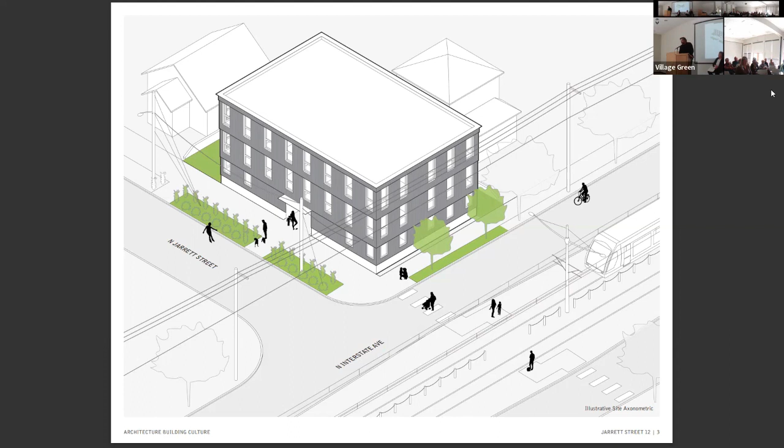Jarrett's a very, very tight little street, and obviously we can't do anything on Interstate — it has to stay operational. So we quickly went to modular construction. It meant we could reduce construction time probably by about 40%, and meant probably 80% of the construction was done in a factory.

Modular construction allows us to build different aspects of the project simultaneously. While we were working on site, while the project was in permits at the local jurisdiction, we already had our state approval for all the aspects that were going to be built in the factory. We could start constructing the modular units even prior to our permit being issued at the city, and once we had our permit for site construction through the city of Portland, we could also start site work — so there's work happening simultaneously, greatly reducing construction time for multifamily development.

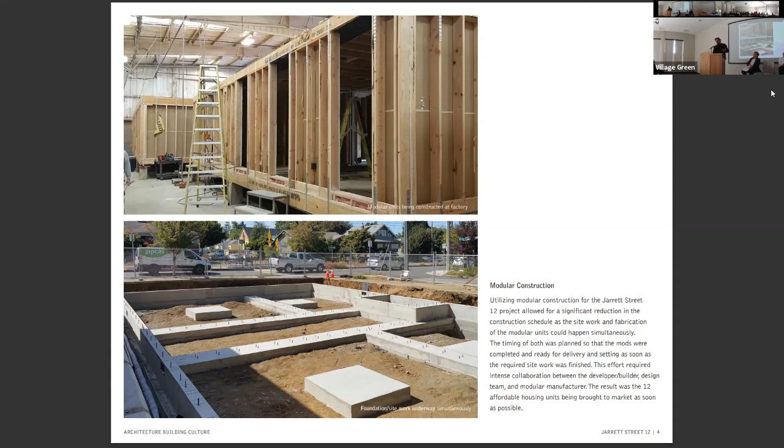One of the biggest things you're really trying to do is minimize risk, but also minimize time. Time is money, and it's also an issue in bringing affordable housing units online — because in a conventional construction and delivery sense, it's just too slow to deliver enough units.

Here's a little diagram showing how the building is made up of 15 modular units. Some dwelling units are completed by putting together two mods — in this case, they're all completed by putting together two mods. It was kind of unique; we had to force some conditions on the mods that you might not normally do if the site had different constraints, orienting the sites and the mods north-south because the site is constrained not only in size but also by power lines.

So you can see the crane having to lift these things almost vertically, bring them over, get them over the lines, turn them and bring them down. We set the 15 mods in 2 days, meaning we only had to close Jarrett down for 2 days — which, except for maybe one neighbor, everybody was pretty happy about.

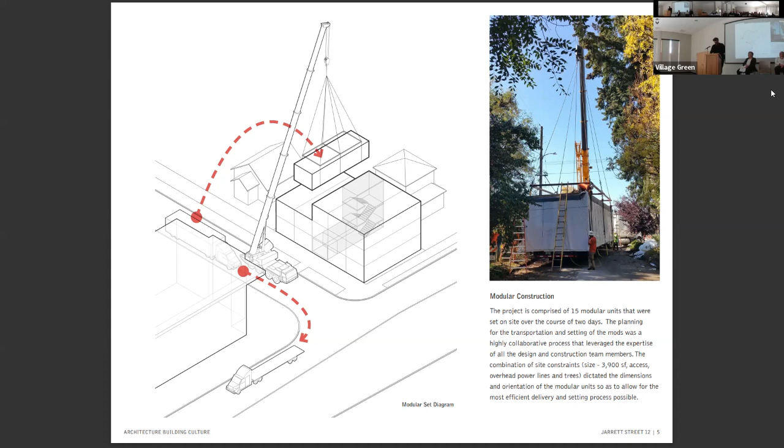If we go to the next slide, you can see what it also forced us to do: create a very efficient, compact plan. Even within this small scale multifamily project, we had 3 different unit types. We had a very small studio unit on the ground floor, directly off the entry. The back units, the southern units, were a stack of 3 one-bedrooms. And then you also had a larger open one-bedroom. But all these are very modest. The largest unit was, I think, 556 square feet, so they're pretty modest in size.

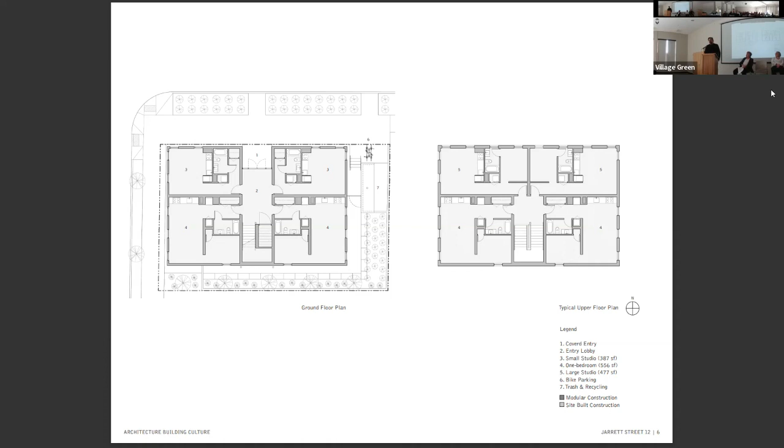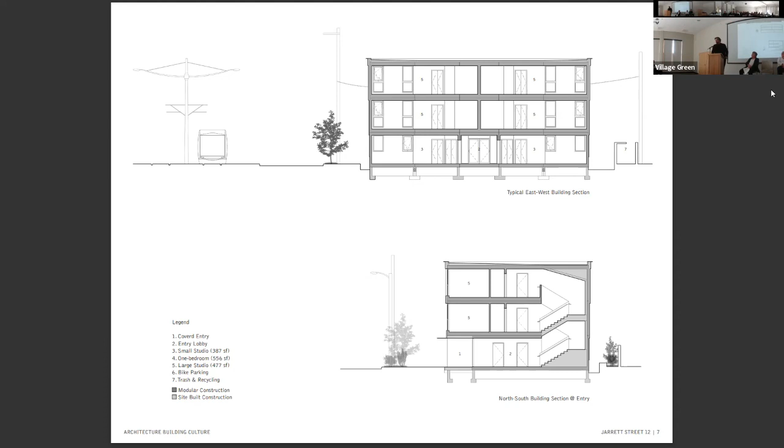Next slide. Another key aspect, which gets to what we'll be talking about, is construction costs. We've done a lot of work with this particular developer, who is very interested in bringing for-sale affordable units, usually focused on first-time home buyers. This particular typology of small infill multifamily housing on what were predominantly single-family lots lends itself to probably the most affordable construction type. These are all type 5B - not to be too technical, but it's the way you build a house, basically. It's very simple construction. Modular construction, especially wood modular construction, is effectively a slightly more robust wood frame structure, because each mod is built the way you'd build any wood structure. They just have to be structured so they can be transported, but it's just wood frame construction. So it lends itself quite well to this type of project.

Next slide. The other aspect to this gets to zoning, and all cities have different versions of this. In Portland, this is in a design overlay zone, which means a normal project might have to go through design review, which adds a huge amount of risk to the developer and a lot of time. But the city of Portland also offers objective community design standards, which if you opt into, the design review gets folded into your normal permit process, so you're not adding a bunch of time. I only bring this up because it was essential for us to take advantage of community design standards, and it allowed us to think creatively about how we dealt with the facade.

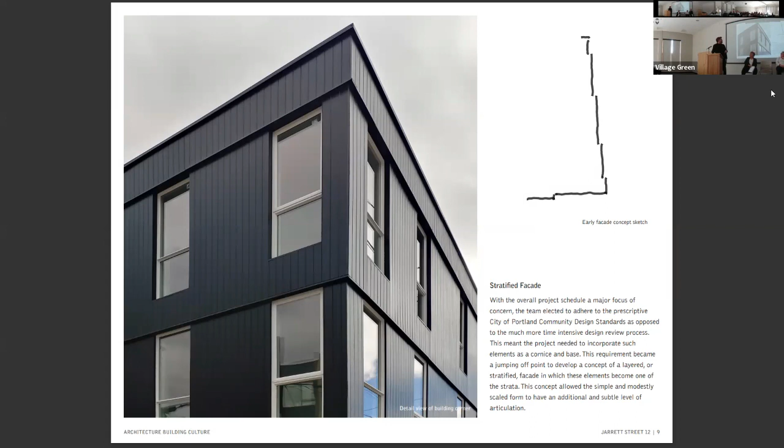Sometimes with modular construction, a developer wants as much of the work done in the factory as possible. We have found that we don't want any of the cladding done in the factory - we want it done on site because it gives us a lot more flexibility in the ultimate aesthetics of the exterior. Not to get into the weeds, but one of the community design standards was that if you don't have a pitched roof, you have to have a cornice. We didn't want a cornice on a contemporary building, so we made the cornice part of these sort of striations or layers to the building, and we blended it into what is otherwise a series of layers.

Just a little bit of detail how that came about. But it all speaks to being able to, within constraints, achieve incredibly innovative and creative solutions. This is a modest building, trying to be very quiet and infill, but at the same time it's a pretty much beloved project by its tenants, with interiors connecting back to the neighborhood.

So the next project, Laura's Place. Laura's Place is technically supportive housing. It serves a center called Letty Owings Center in Portland, which serves single mothers who have come through issues with addiction.

So it's a recovery program. When they graduate from Letty Owings, they can go to Laura's Place for usually about 6 months. They usually have a small child, and so they can begin to reintegrate themselves into daily life and all the things that it needs to live day to day.

CCC was donated this strange old house, so all of this is the existing portion. It used to be a 2-story house. A couple owners ago it caught on fire, they scraped the second floor, put on this little weird mansard, and turned it into a little tiny fourplex. When it was a fourplex, it was donated to CCC, and CCC operated it for a bit.

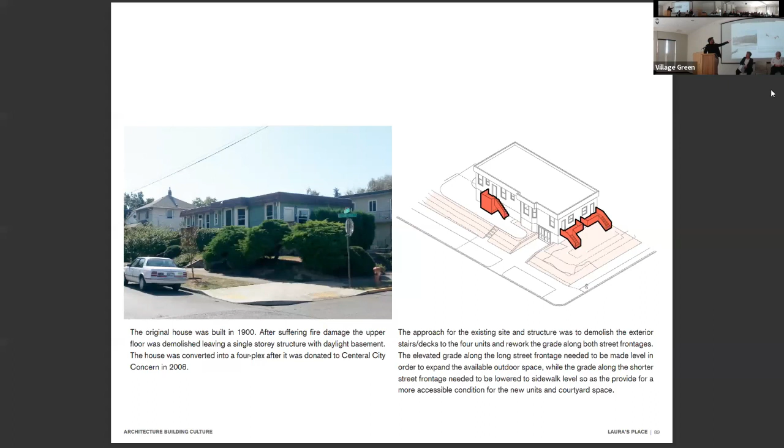We were thinking about if we take these 2 units, how can we completely transform the site for the residents, for the mothers, for the children, make it safer for them, because in its existing state it wasn't really very safe in terms of the entries, providing really no common space for the residents, no spaces to play. So we thought strategically we'll deal with the yard spaces and make the entrances much safer.

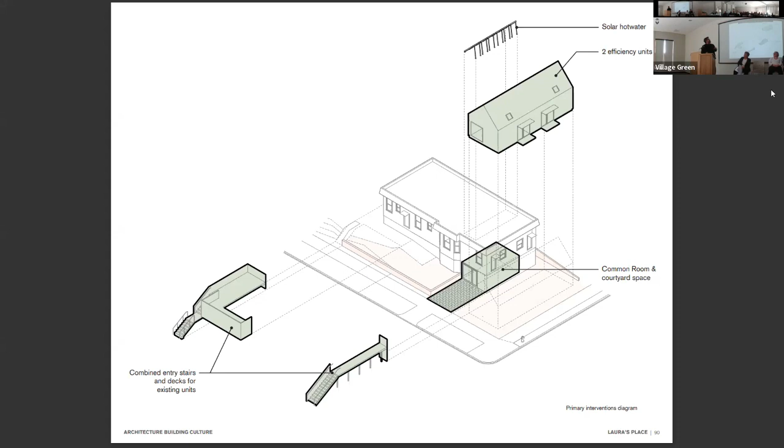Through these strategic interventions, new, more visible entries to the existing units. The two new efficiency units will offer more at-grade entries, solar hot water, and we turn the old garage into a community space. That whole addition is probably 720 square feet, about 360 to 380 each.

You can see the result is us expanding that previous front yard into a more usable space, with at-grade units. The new two efficiency units create a little courtyard space outside of the garage, and of course the solar hot water, plus a series of pretty economical ways to achieve green walls and create more landscape and green space around.

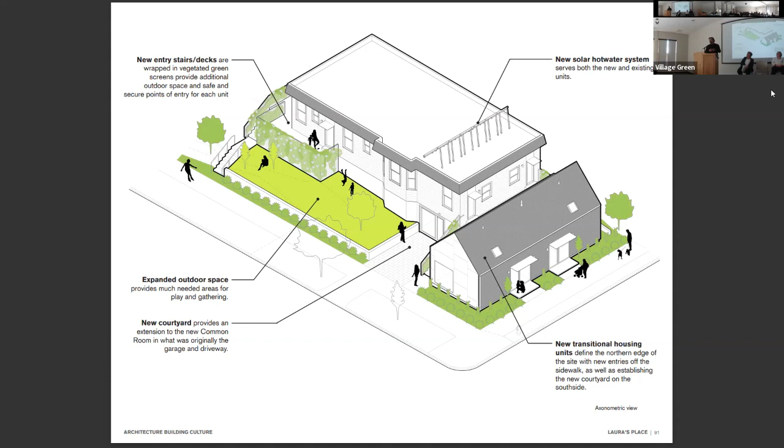So here's the plan of these two little units. If this type of unit was in a larger affordable housing project, you'd think of them as efficiency units. But they have a little kitchenette and a small sleeping living area that can fit a two-top, plus bike storage and accessible restrooms.

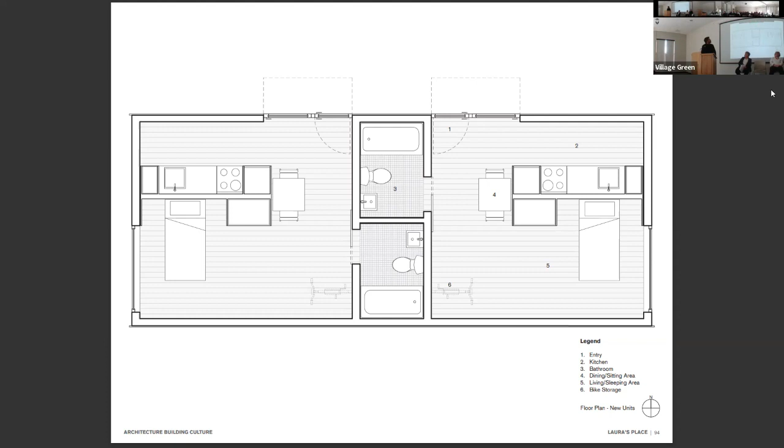We weren't going to do anything to the existing house other than maybe try a paint scheme that plays off the new project. This is very early on, so all that screening around the deck spaces and entries to the existing building — if you were to go there now, it's full of a flowering vine and very dense. So it's been pretty successful.

Just going through these final images. Thank you very much.

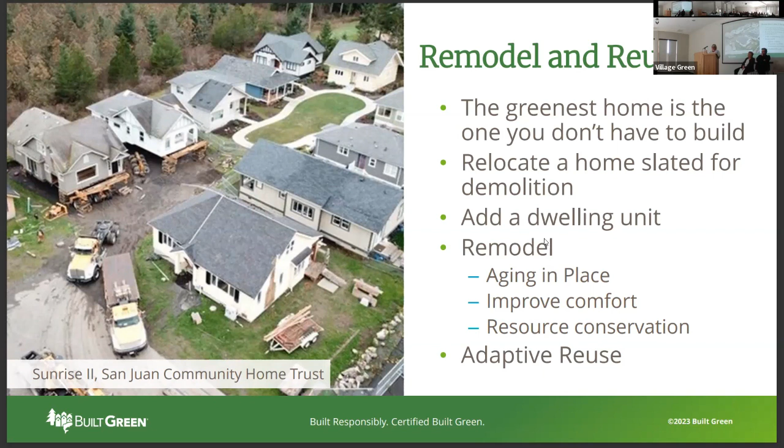We can add a dwelling unit, similar to what Brian's project did, where they sort of added another unit. This is also known as what we call an ADU, which is an accessory dwelling unit, or a DADU, which is a detached accessory dwelling unit. And so that's where we can do that. We can remodel, as I mentioned, and adaptive reuse is using commercial spaces and turning them into housing.

Limited footprint - we can just build smaller. Smaller houses take less resources. We can fit more of them on a lot, and that will help spread out that land cost over that project to many more units. But it requires the zoning changes that we discussed.

Prefabrication can be using technology to really find those efficiency zones, really take chances without having a risk, because we can do it in a computer. We can use a modeling software to make changes without having to necessarily redraw everything, or in the field find out, oh, this wall doesn't connect. As Brian mentioned, we can use factory production, which can reduce material use and time up to 80%, which time is money, as he said, and that is very much the case. And it also reduces labor costs. These prefabrication modular kind of features take a lot less crew on the ground to put together, so that also helps when you have a labor shortage.

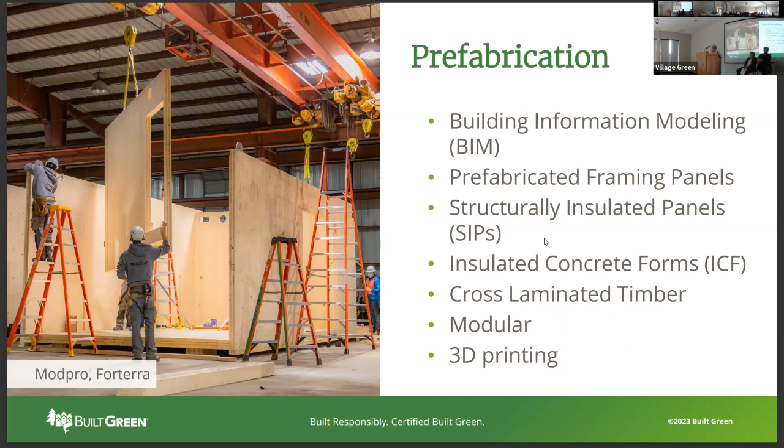These are all different forms of prefabrication. So we have prefabricated framing panels, which are essentially just normal framing panels built in a factory. Structurally insulated panels, insulated concrete forms are basically your whole wall structure prefabricated with insulation and everything, and you kind of put them up, not quite like Lego blocks, but like pre-made walls. Cross-laminated timber is what this is a picture of - similar concept, but you're using laminated wood that's laminated in different ways. And then modular and 3D printing is a new one, which I don't know as much about because none of our builders do it, but there's some really cool things if you want to go down a rabbit hole.

Alternative ownership is one, the next slide, is one last thing. This is really different pathways we can take to help people become homeowners.

So there's co-housing, which is an intentional community of private residences with shared common spaces, and then limited equity cooperatives, community land trusts, and deed restricted homeownerships are all different ways to take one plot of land, and all of these options are sharing them with the community.

So they have different equity components in terms of everyone gets a place to live on that piece of land, but they may have limited equity if they go to resell. And typically these involve limiting the people of who gets to live there to a certain income level.

So the easiest example of one of these options to think of is like Habitat for Humanity or a community land trust, which is what the San Juan project I showed. So those all deal with basically you own the home, but you may not own the land. And so you still can build equity on that home, but you are limited in terms of you can't go and resell it for $1 million if that's what the market could sell it at, but you do build equity, you own the home itself.

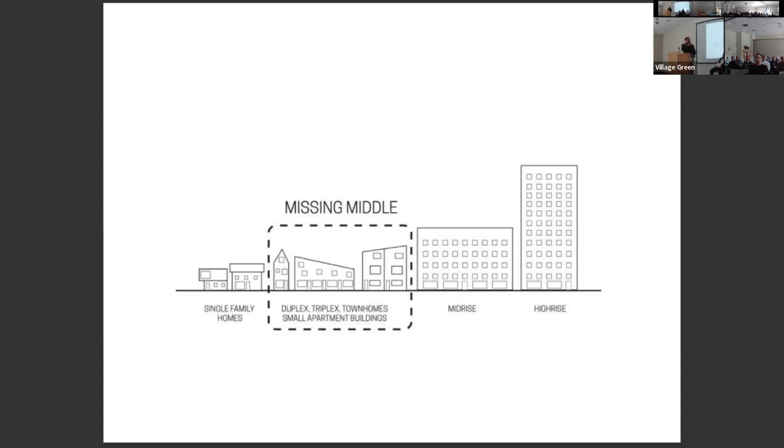When I first took office, we didn't have a rental assistance program we could use as a model. I developed one with my staff in partnership with other agencies. It was tough, we didn't have a traditional model. I partnered with Bremerton Housing Authority. They administered the program and agreed to do it.

The second year, they were so impressed with the success that they decided to match us dollar for dollar. They deserve a lot of credit. The third year, the state created legislation allowing them to rebate sales tax back to jurisdictions we funneled into this program. So it was a step-by-step process to get that going, and we're still doing it today, and we've increased what we contribute.

This is another program you're all aware of, but what I did is bring it to a city program. I created a city program, and we have more freedom when cities develop a program like this. This is mainly federally funded for most jurisdictions, but federally funded programs have a lot more restrictions. We can veer off and create a Bremerton specific program, which we did.